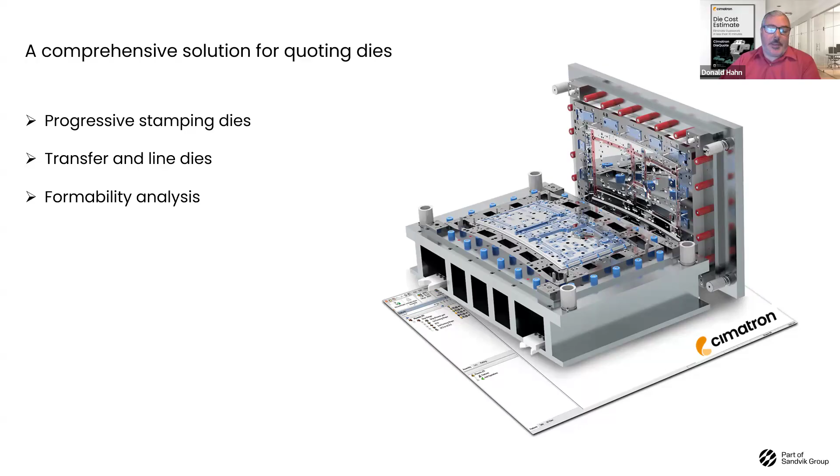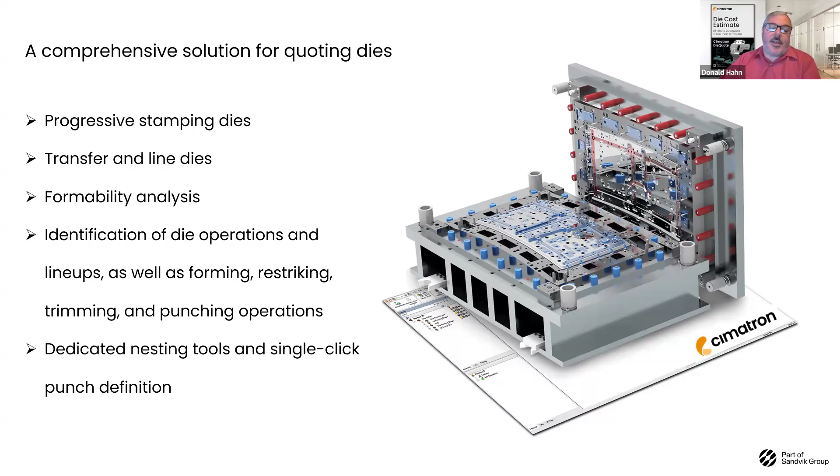Thank you, Brad. So today we'll be looking at our comprehensive solution for quoting dies. We'll be able to handle both progressive stamping dies and transfer and line dies as well. We'll show you some of the formability analysis tools that we have. During the demo, you'll see how we can handle die operations with forming, restriking, trimming, and punching. We also have dedicated nesting tools and single-click punch definition, which we'll show. We have some measurement tools for thickness, draft angle, and body integrity. We also can calculate automatically the die sets, plates, components, and stations. We have support for multiple currencies and labor rates.

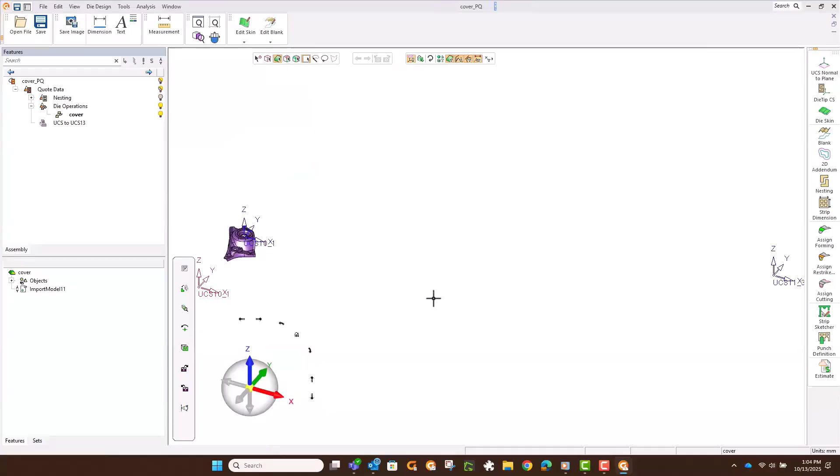Once we have established what we're reading in, we're going to bring it into our progressive die environment, in this case, since we're going to do a progressive die quote. On the left side, you'll see the history and the operations that we're going through with each step. On the right side, you see the guide, which simply steps us through the quote.

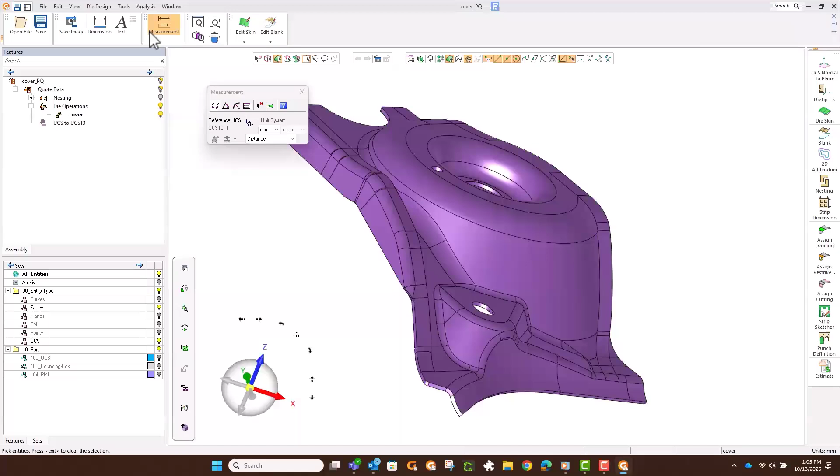First of all, the part that arrives may not necessarily be in the perfect die tip. We have the tools, though, to establish what that tip should be, and it's a little better than just visually looking at it. Other things we might need to check are to understand what my overall sizes are, how much space this thing is going to take up. Here you see it will quickly generate a box for me to get the overall XYZ size. It could be in millimeters, could be in inches. You can work in any of those formats however you wish at whichever time.

Another nice tool is to check to make sure that the angles of the part are going to release. Here you see a draft angle analysis tool, based upon a range of colors and values that you can control. So anything less than 10 degrees is going to show up in a color other than green.

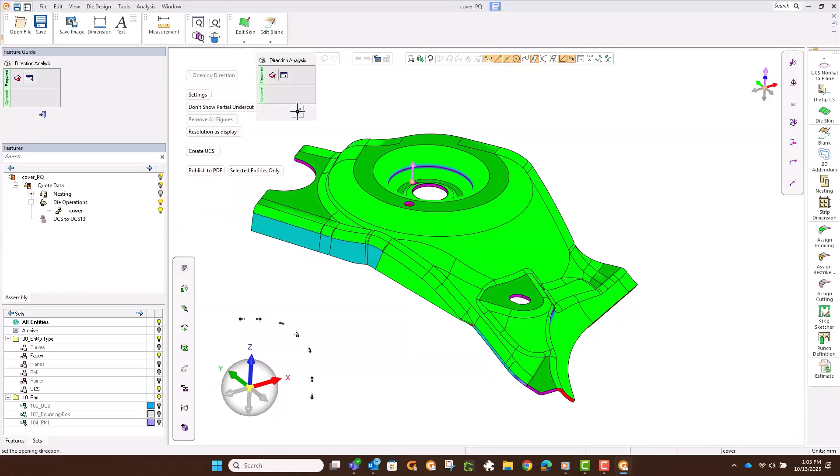If I'm truly at a vertical wall, you'll see 0. If it's flat, it's 90. And all through, I can check to see at every location if I've got a wall that's going to pull correctly or not.

Finally, we also look at the material thickness. If it's going to be something I'm going to make off of a coil, then definitely I want a consistent thickness. There might be areas too that require another operation, like a coining operation, for example.

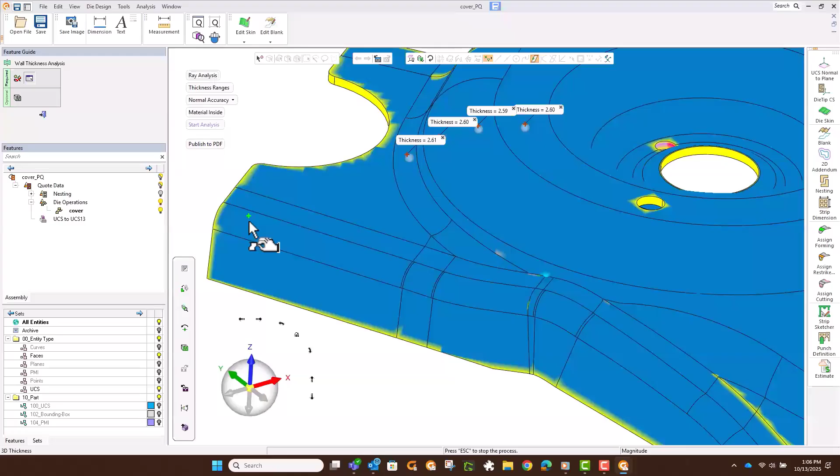Here you can see using some tools to quickly measure in any specific area, like with a sphere or a ray, we can get that overall thickness. The ray simply works normal from whatever point I pick and stops when it hits the other side, whereas the sphere looks at the volume between all the faces right there in the nearby area.

With this tool comes a nice looking sectioning tool that will likewise display in the same colors and color ranges. At any time we can cut a quick cross section if we need to explain something to a customer, or ask them a question why there's a difference in the thickness. So lots of quick visualization tools.

And you'll see up there on the main menu, save image. So there's a lot of quick shortcuts to getting the information we need.

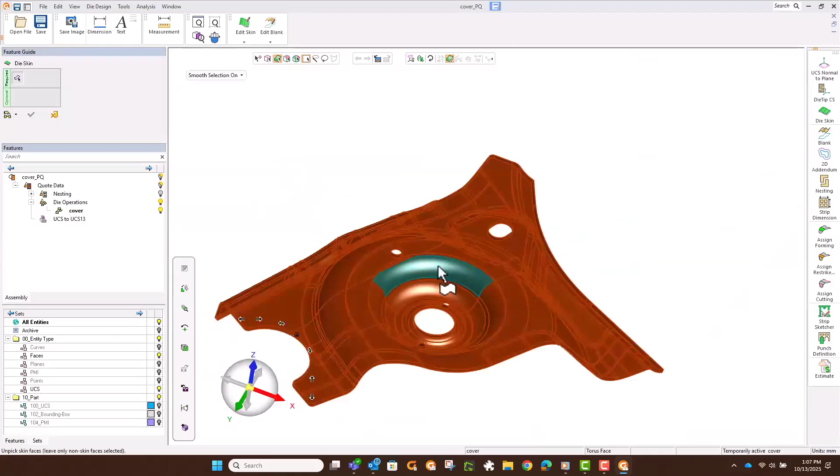So at this point, we're going to decide if we want to work with the inside or outside. That's so that we're going to mathematically compute from one side or the other, or down the middle, whatever the formula is set for, 1/3 or 2/3 relationship.

Now we're going to estimate the blank. Here you see within the library a ton of different materials that are available, already pre-built for you when it comes to estimating what their blank is going to create. Of course, every material has different properties, so the results are always going to be different depending upon that material. So let's pick one kind of middle of the road here.

You can see the system knows it's 2.6 mil thick. And now we'll do a thickness analysis, checking to see the percentages of the material as they may flow.

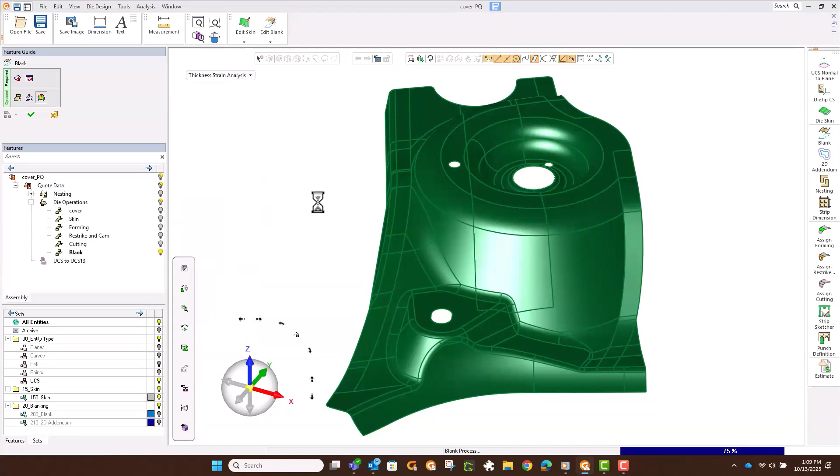Some areas the material may gather, some areas it may thin. Here we get a good view of exactly what that looks like in terms of the percentage of that material flow. Wherever I bring my cursor, I get the full breakdown if it's safe or not.

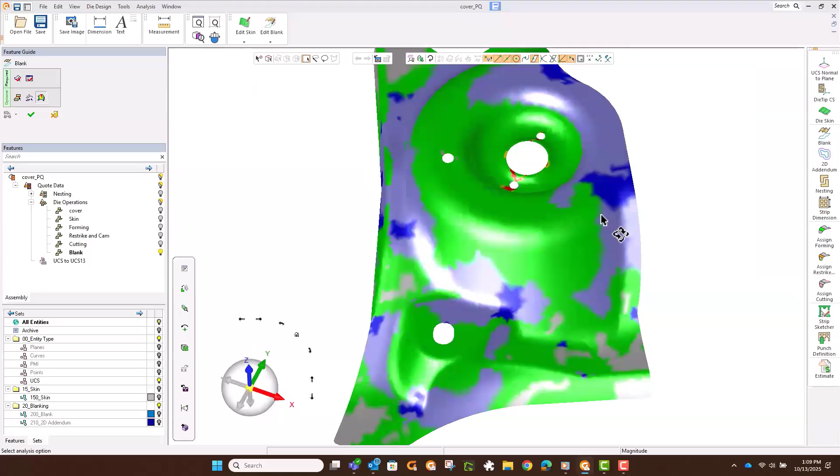Another useful tool is the safety zone analysis. If you're from the die world, you can think of this as your FLD curve. It's going to show you areas that are likely going to split or wrinkle. Some very quick tools to help you understand the formability of that part.

So we're going to actually go ahead now and calculate out the blank, and we'll let it take a few seconds to get that outline. Within just a matter of seconds, you can see how it factors all those things in to get our overall blank. So you would think of this as a one-hit type of application, a one-hit type of blank, rather than a fully developed incremental type of blank.

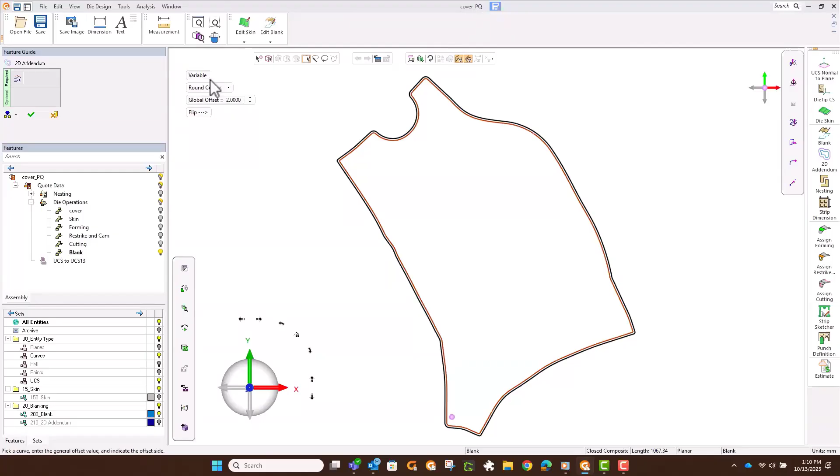Here we're creating an offset. Maybe we want extra material all the way around, and we want to include that in the piece part price because we're going to come back and trim it up later. So we'd like to see where that trimming operation will take place.

In our nesting tool, we can do a 1-row, 2-row. You see how it tries to reduce material usage by interlacing those different nested blanks.

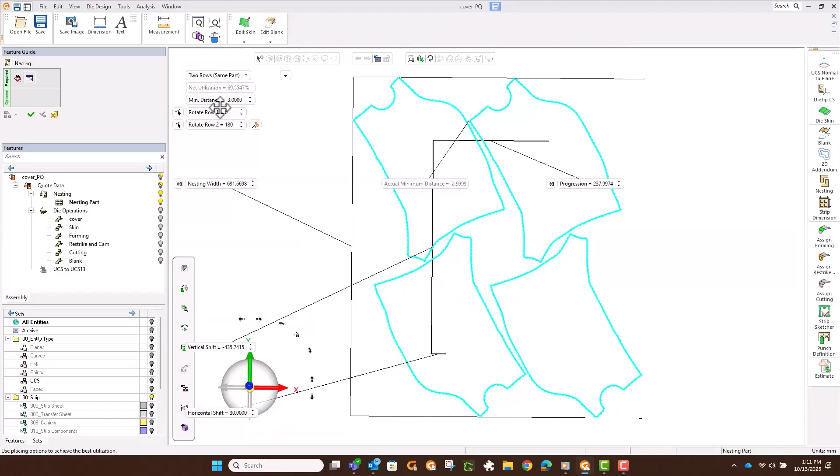You have full control over how far apart you want the different pieces to be, all the while keeping track of your scrap, your net utilization. You see it's also factoring in what the progression should be.

Now, if I wanted to, I can get the optimal nesting condition where it has the greatest net utilization, which can be nice, can be useful. At times that optimal condition may not be the best tool though.

So here I've got in mind where I want to have the web attached to the part so that I can carry it, and I want to rotate that to that position. Just by flicking through these different up and down arrows, you can see easily we can control where that nesting is going to be.

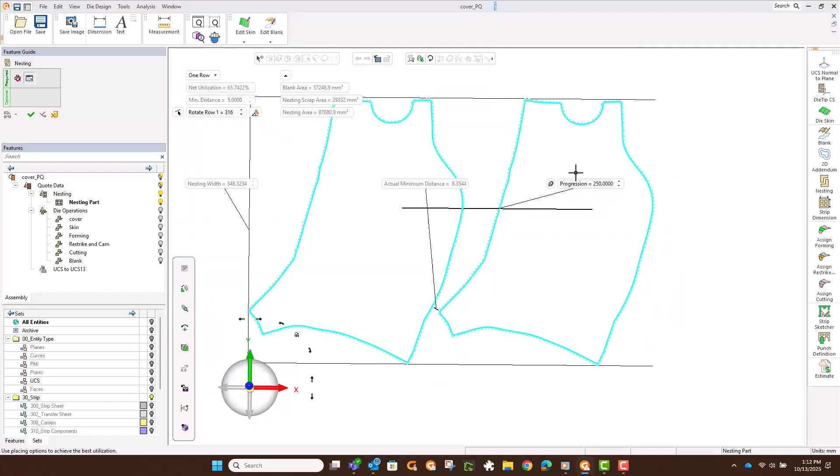And how far apart the different stations are going to be. And maybe we'll round the progression to an easy number here, something easy to remember like 250.

So quickly, we've got the nest done. Next, we want to get our overall coil size. Do I want to trim off to the very corners of my blank, or more than likely, if I'm going to have a carrier and web, I need a little extra material there. You can manipulate these numbers so it's either uniform on both sides or different. With a single carrier on the top, I don't need any on the bottom, so I'll leave just enough to shear off that sharp corner.

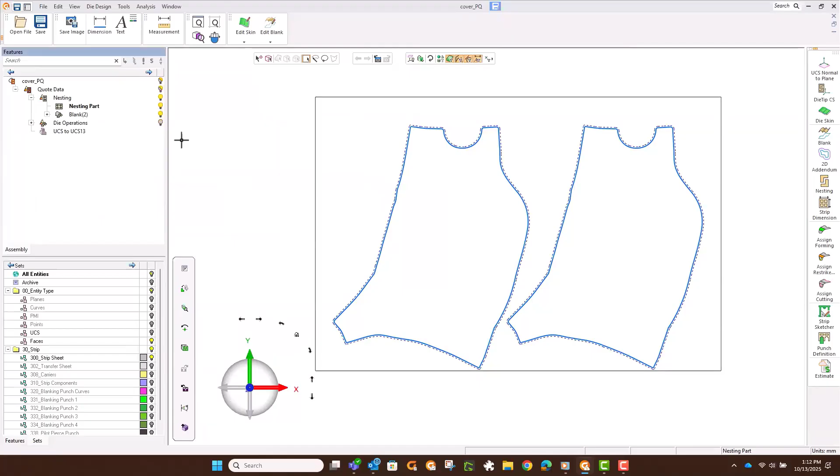There I have my overall strip width that I'll be calculating from.

Inside the sketcher, we want to get just a rough idea of what this strip might look like. We don't have to be perfect or pretty it up like a full-blown progressive die design, just get estimates of how big the carrier might be or where we might put our webs. Here I'm envisioning at the end I'm going to come back and shear off that half round shape. Maybe I'll break out 2 punches there and have a punch at the bottom to clean up that edge off the coil. Everything is very easily manipulated. You can add dimensions, but you don't need them.

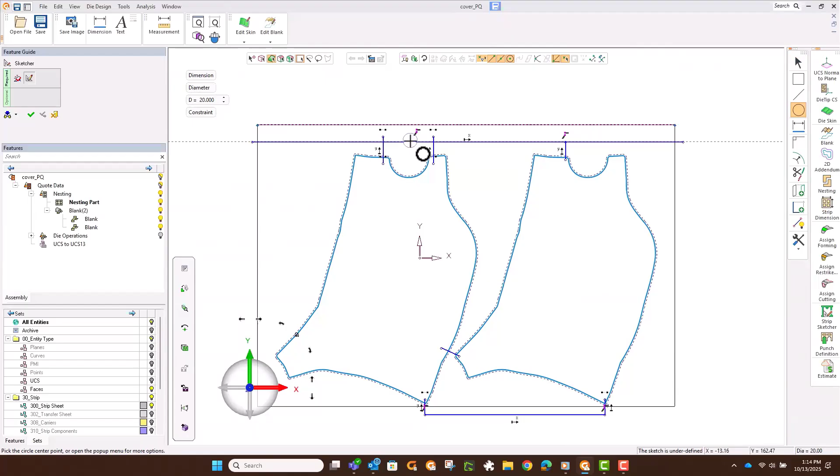Pretty much the sizes we get are going to come from the geometry itself when we get our calculation for overall steel sizes. Next, we want to have a pilot. Where I put the pilot isn't really that important, it's just a matter that I have it, so I can identify a pilot station, and it will carry the number of pilots down the road with each of the stations we generate.

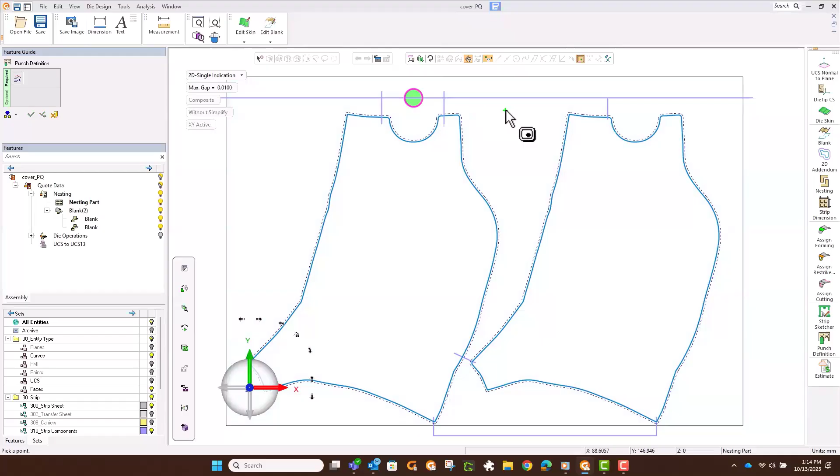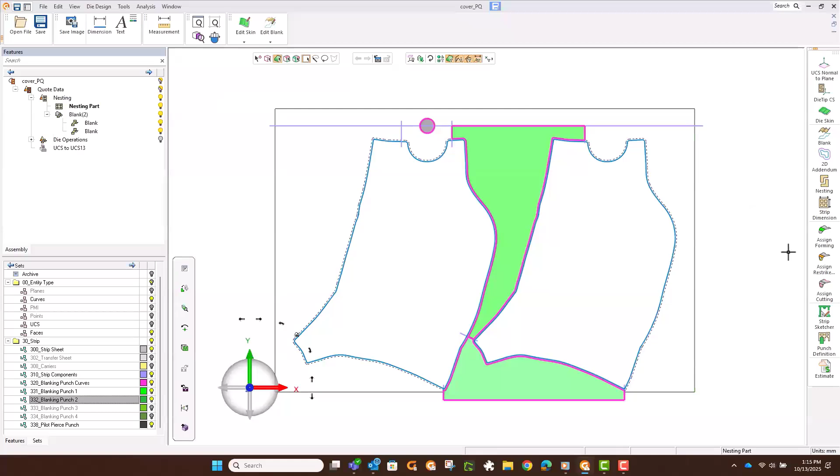So to quickly get some punches, we just single pick indicate where those different punches, or in this case the pilot, are going to be. Here I have a big punch that's going to take that material out. This one's going to come off the edge. So I've got 2 major punches and my pilot, and we identify what goes on what station. Here's a pilot for my pilot station, and I've got 1 blanking punch, here's the second blanking punch. So you see I've already got 3 punch stations, and I already know the sizes of the stations. I know the perimeter, to understand what it will take to wire EDM those punches, as well as the holes the punches go through and the holder for the punch.

Let's do something similar now when we look at the forms. Basically, how many hits do I want to form this? Well, I see the 2 sides that are bent down as separate forms. I might see another form in the middle. So I've just used the paintbrush here and quickly traced across what I want to call, in this case, this flange form. So I've got my main form done already, and now I'm going to break out each of these individual smaller form areas.

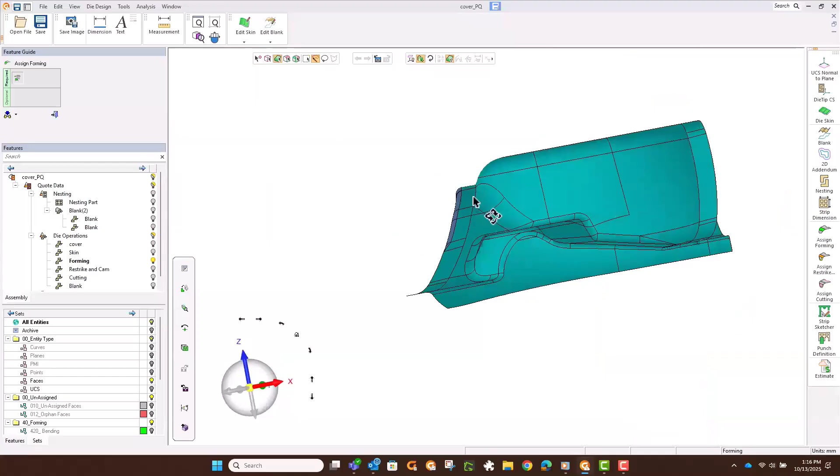Maybe down here in the center, I'm going to bend it down, then bend it back up, and I'd like to isolate each of those. So just by dropping in the paint, and then coming over here to my list, calling it a form, I've now got 4 forming stations. And again, it knows how big these stations are because it's taking the measurements right off the part. All right, here's another one. If I get extra, just repick it, and now I've got another forming station. So very quickly, just by coloring the part up, I'm identifying the type of station, and it's getting its size, and it's going to be able to calculate the cost of that station.

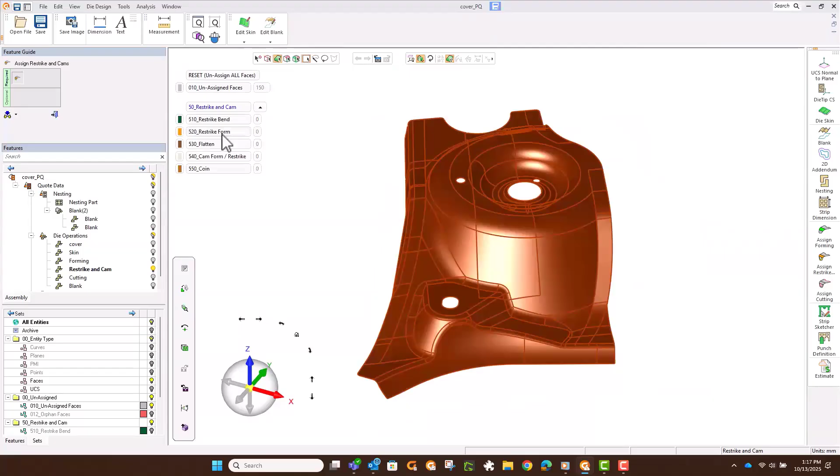Next, let's pick everything for a restrike. Maybe I'm only concerned with the outer 2 flanges to make sure they're correct, but we'll go ahead and hit everything. Again, you can have a number of different restrikes. Now I'm looking at all the different trimming as well as typical punch holes. Here I've got some circular holes, and I have a non-circular hole, so I have a number of different catalog punches I would use to create those.

At this far end, we were looking at cutting it off. So we'll call this a trim edge. It's basically picking the geometry that we want for that trim edge, and that will be a direct trim.

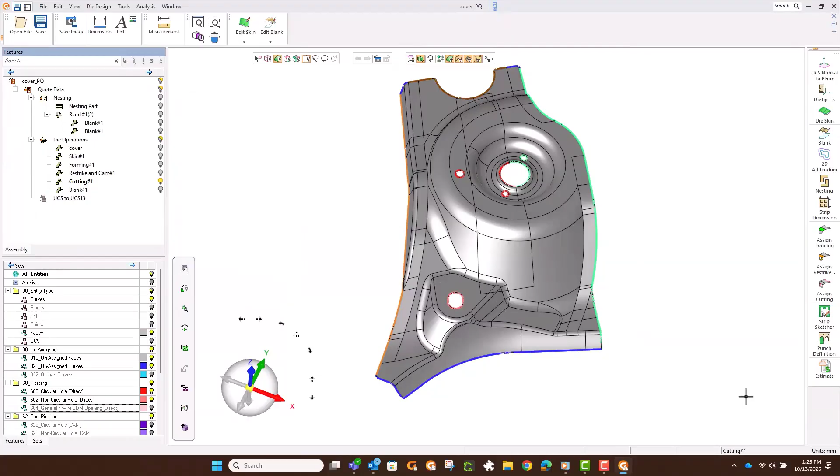Now maybe I want other things that are going to be a trim. Maybe I want that edge to be on a trim. You have the choice of either making it a direct trim, or it can be a cam trim, where you use a side mechanism to trim that. That will greatly affect the price, also the tooling price, because you have that station.

Finally we'll take it over to costing, where we say I've got a single edge carrier, and we'll generate some prices. As soon as I see my die quote, it has already calculated the tooling cost. But let's step through and look at it.

It's just basically working off the standards that we already have in place, so those standards can be your standards. You'll see how it's calculated the overall blank. It's looking at the different cutting and forming, the wire EDM distance, the number of stations throughout the die. It's calculated everything that we marked up, and it knows how many blanking stations and how many trim stations.

Maybe in my mind I'm thinking I really could use one more idle station. So you can easily just go in and change that value, tell it to update. Then it grays out the top there, like you see with all those top tabs, so it wants you to take a look at everything to make sure it's where you want it to be.

Do I want to have nitrogen springs? What type of materials am I using? Here in the pull down, I can grab any common steel that I have set up in the library. And when it grabs that steel, it's of course now going to cost that plate out based upon the steel price that's already set in the system.

So I would pick those steels, something that makes sense, obviously - O2, A2, that kind of type of steel. Here you've got your overall lengths of each of the plates, the plate thicknesses.

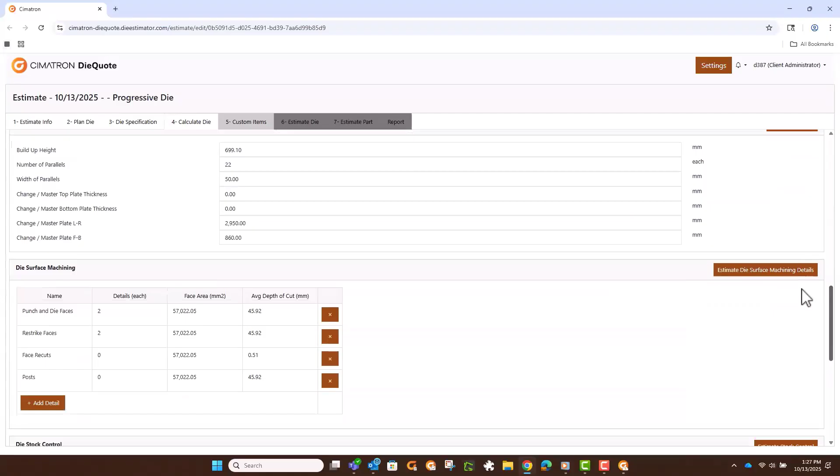And now we're looking at the press. You can have a library of presses based upon the customers that you're quoting for. If you see something in red, that means it does not meet the specification of that press, so it alarms you to that. There was the overall stack height.

Now I'm looking at parts that I want to maybe have in stock, just so I have those for replacement if I need them. Is there something about this particular die that's different? Well, I can use some parts that aren't typical, that I might not usually quote for a typical die. Like maybe I want to have a chute to gather all the slug drop and kick it off to the side away from the press. You can include those things as well on a non-typical basis.

Once we have done that, we looked at some of the settings, so it's now going to recalculate where everything gets updated live as we work with it. Under estimate die, the blue is your material, the green is your labor.

So here's a full breakdown for all the different plates - here you see the parallels, you see the punched holes, all your stripper plates. We've itemized out the spring pockets, the spools, what is involved with each of the materials, and then of course the labor rate that goes into performing that operation, whatever it may be.

Here at the end, you get the final cost breakdown - about 235,000. Up at the top, you see it was done with United States labor rate, so also no profit. So let's say maybe we want to do it somewhere else.

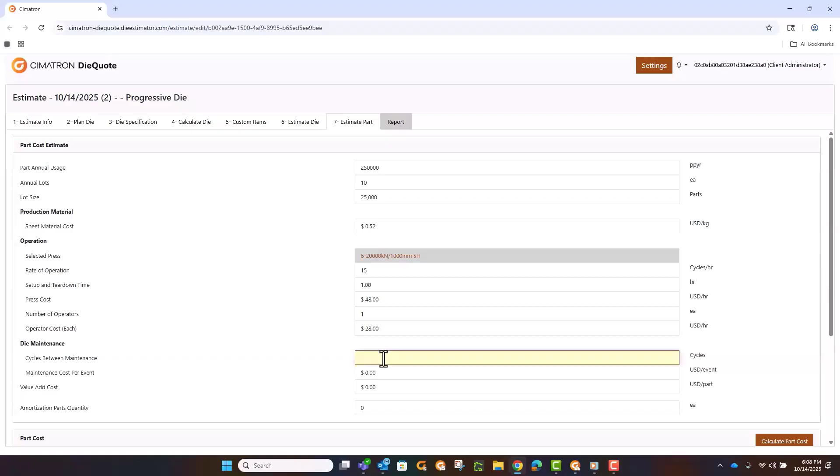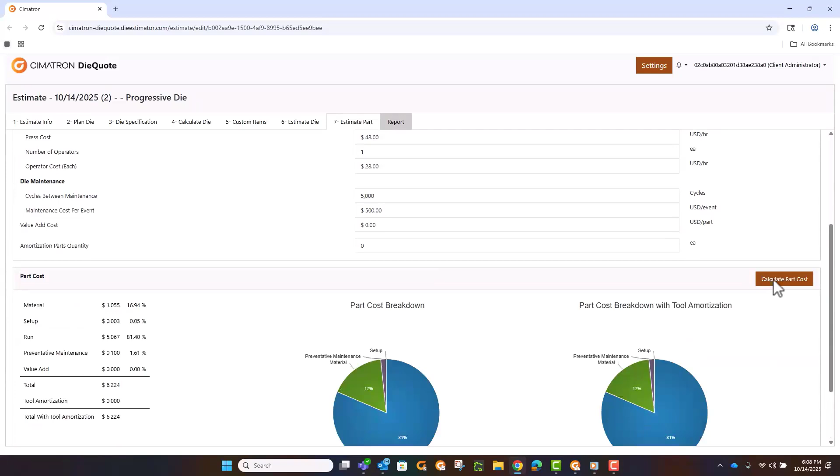Well, probably should take a look at it, maybe do some maintenance. Maybe 50 thousand is too much, let's go 5 thousand. And then each time I interrupt, what am I going to charge for the maintenance? There's a place you could put a value-added cost if you want, and you can amortize your tooling over your piece part price. Here we just broke it down to what it would cost to make the part.

So a fantastic calculator for putting together a piece part price. Now in our report, we gather all that information together. Here you see every bit of it ready to be sent out to a report, and when we send it out, it's going to be an Excel format.

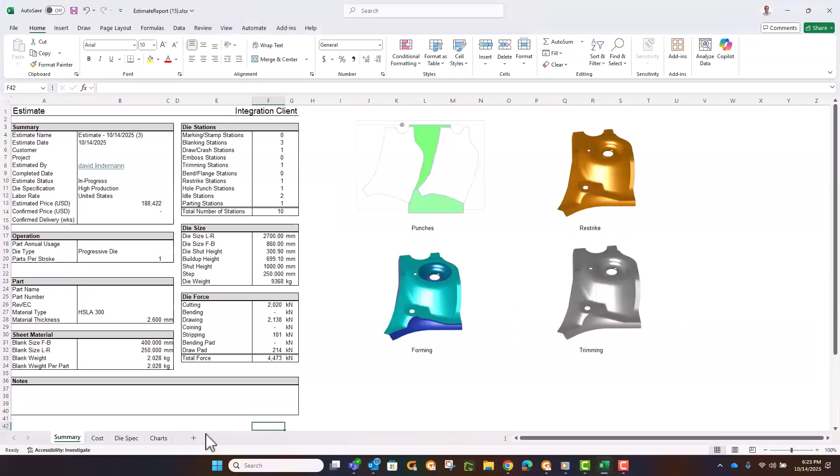So from there, you can customize it to whatever your needs are. Maybe you've got different Excel spreadsheets or templates that you use for different customers. You see a summary, an overall cost breakdown, your die specs, and your charts. And you notice on the first one, the summary, you can drop pictures in at any time, just hit the picture button and pop it into your report whenever you want.

So that's a very fast overview with a breakdown of everything we could talk about as quickly as we could here. Let's just run one through again, and we'll do another progressive die with a different part.

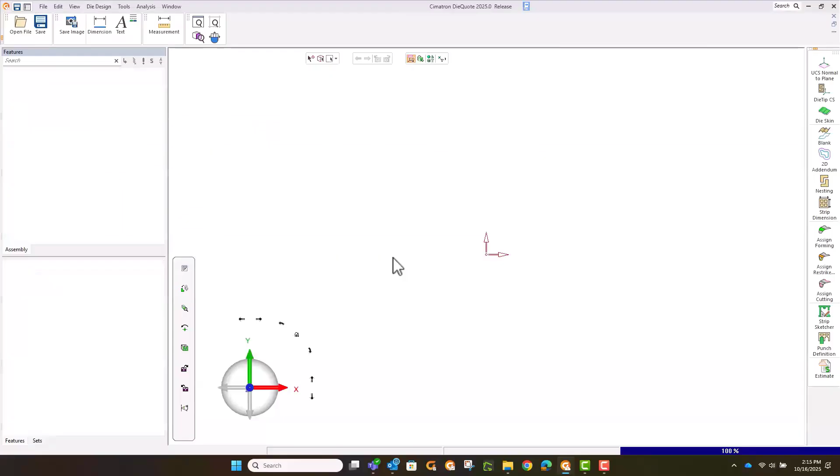This one's going to be quite a bit bigger. And looking at this part, you can see it's got some big flanges on both sides. There's a lot of forming going on right in the middle of it. So maybe we envision it to be a 2-out.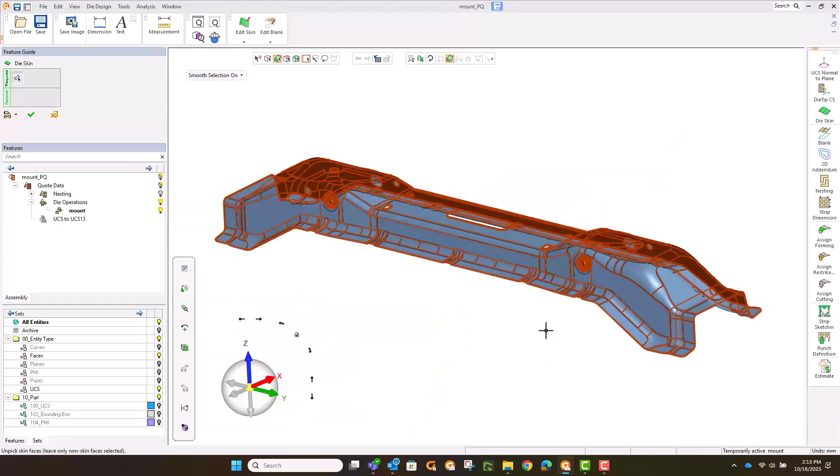It gave us an interesting message when we went to skin it, saying there's extra material here. You can see that this part came with the nuts already attached. So instead of worrying about removing that geometry, we'll let it do it for us. It knows what the sheet metal is that we're attacking, and that's what we're going to build on.

As before, it breaks it out into those 4 operation zones where we can identify what we want to do with each. Here we go right to the blank. Again, the thickness has been established, and the material properties have already been established once we pick the material, so it knows how it's going to go about unfolding it.

Much as before, it's a crash form, which is usually sufficient for a quote. Again, the strain analysis lets us check for formability, making sure we're not getting into anything too terribly deep that's beyond us. I might worry about some of the wrinkling that I see.

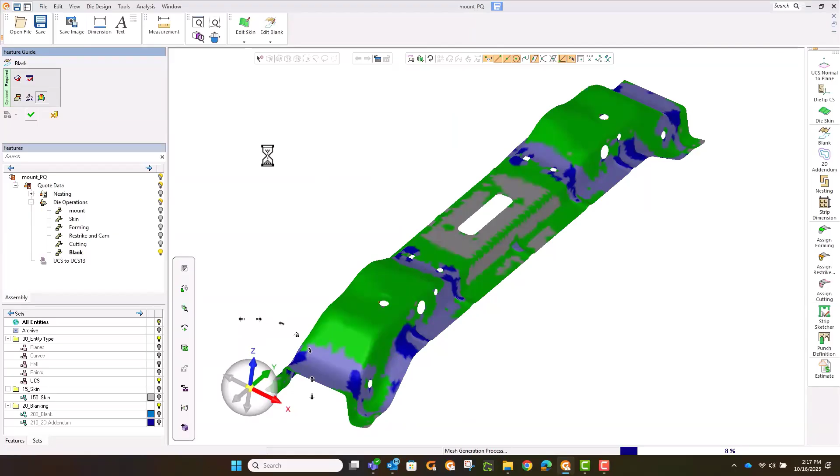So that might tell me I might want to stretch that material a bit. Do I do something else like form it twice, or add more material around it? If I were doing a transfer die, would I want to maybe put a draw bead in? The blank will allow you to do just that. You can also include draw beads as well as blank holders and pressure pads.

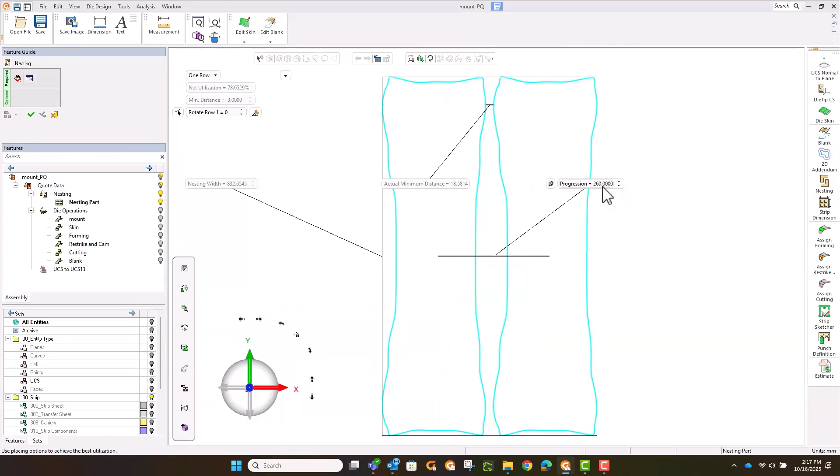Like before, we're setting up the nesting. As I pull my progression wider apart, I can see the actual distance left in between. That's going to give me an idea of just how thin that one little punch is going to get. In this case, maybe we're thinking we'll have a carrier on the top and a carrier on the bottom.

All right, so give myself a little more material to work with. And like before, we want to create as simple a sketch as we can.

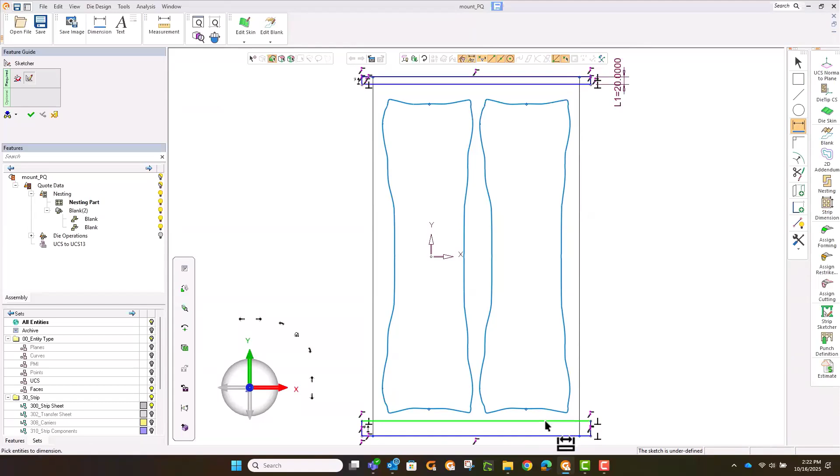Now, I had someone ask me, I do pretty much the same type of carriers and webs. Can I just keep doing that and save that sketch and use it again and again? Yes, you can. We do allow for that, so you can save your sketch and just drop it in. You might look at this part and say, well, I'd kind of like an expandable web, at least on one of those ends. Well, that'd be the time. Create it once, save it, now just drop it in.

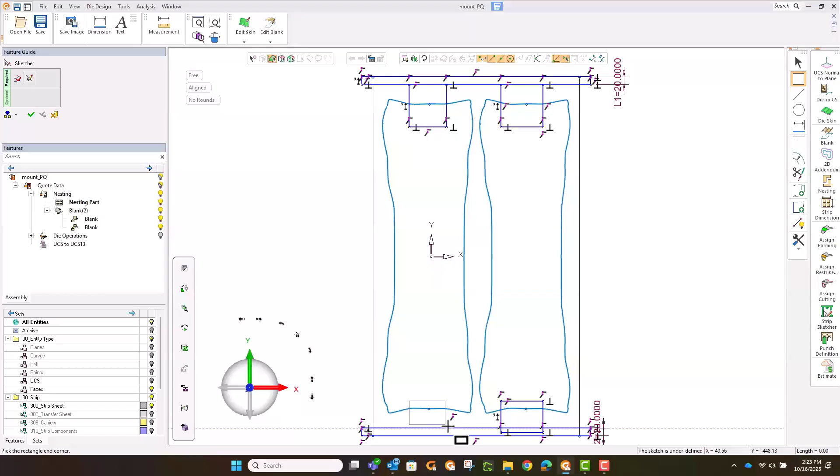Another way of handling that is, again, you're just looking for the cost of it. It would be to add another punch station and include the cost for the punch that it would take to make the expandable web. So I'm letting the constraints of the sketcher show me when I'm lined up, parallel, perpendicular, and maybe just a few dimensions here, just so that I know I've got the balance that I want. So you can see just a couple picks, snap the dimension in, and I'm good.

I'm really only concerned about that punch area that's between the two blanks. Do I have to be perfect on those corners? No, I'm just getting the essence of what I need to do with 3 punches to create that part.

Again, I'd like to create a pilot. So we'll simply just snap in a pilot. I'm not even worried about lining it up perfectly. I'm not designing here. I'm quoting.

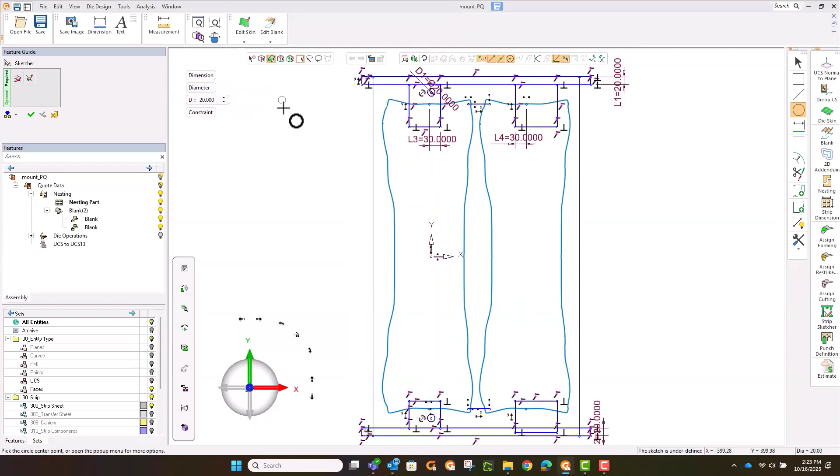Right? So now we can go about and establish how big these punches are and what the size is and what the cost will be then. So single pick those areas again. There's my 3 punches.

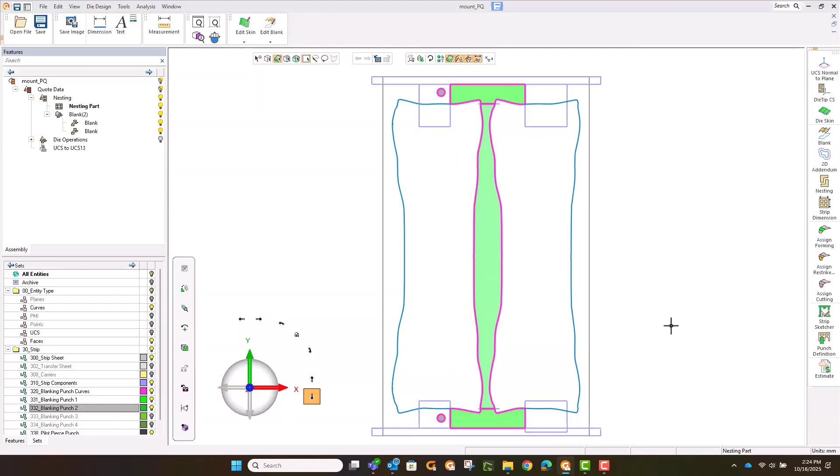And then with the 2 pilot holes, we'll pick both of those. We'll tell the system they are uniquely the pilot. So that's going to be the shape repeated. That's where my pilot's going to go. So I have a station for those. Maybe the 2 end punches I'll keep together in the same station, but that big middle one, we'll put that out there as a separate punch.

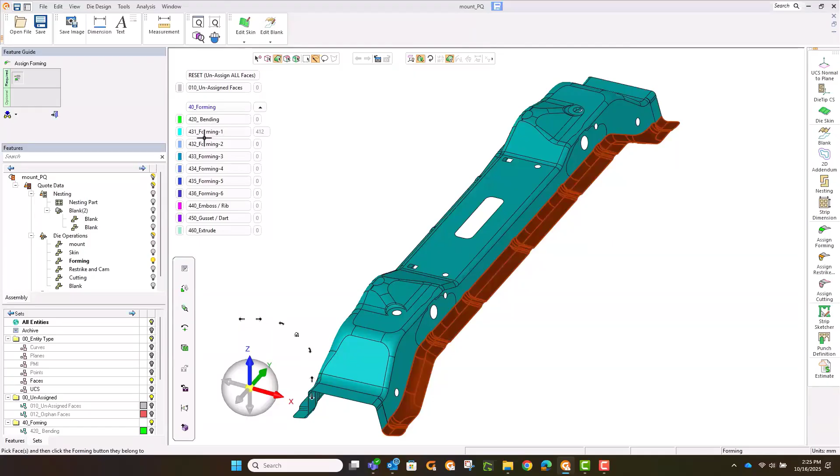On to forming. Well, I'm probably going to form the majority of it, as much as I can anyway, with the first hit. But then I need to address what to do on these outside flanges. So we'll go ahead and pick these. Now by picking that and putting it on a different, you almost call it like a set or a layer, you see it will deduct it from the first forming station and include it in the second forming station. Likewise, we'll do the same on this side.

Maybe I want to include these as 2 separate forms. That way I can use forming punches to come down in between where the blank would be, basically. So one punch would do each side at one time. Okay, that looks good. Again, it's generating all the information for me that I need in the background.

Let's do a restrike on everything, as opposed to making maybe 2 separate restrikes for each of those flanges. And now let's take a look at what we're going to do for piercing.

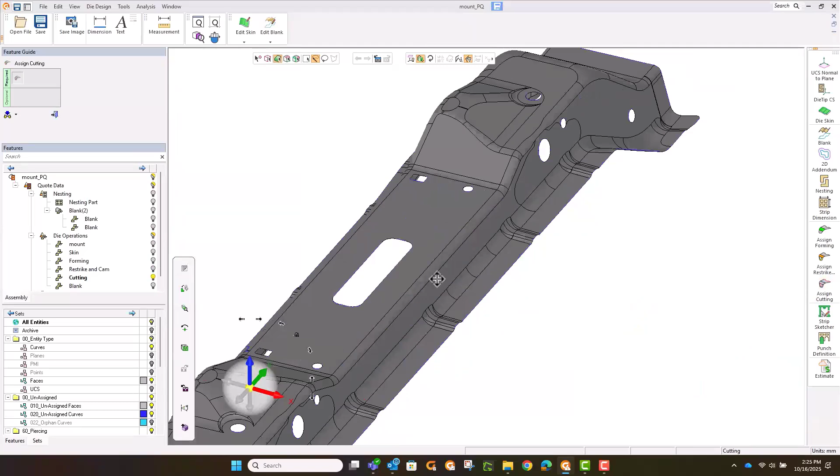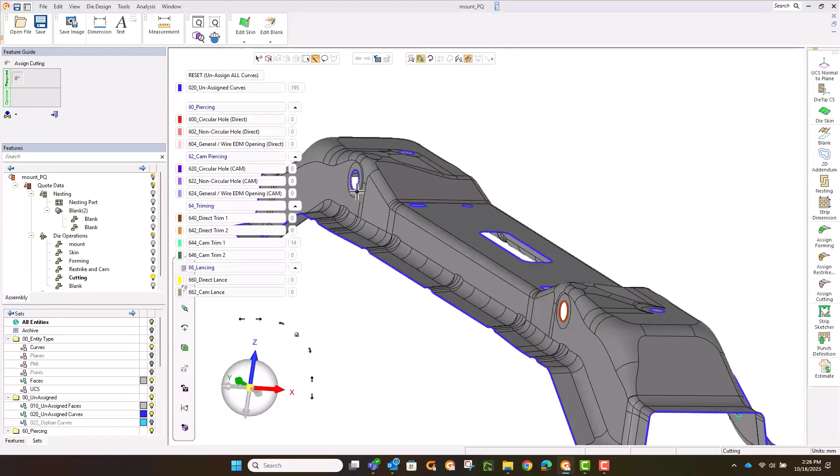Well, here I've got these side holes, and I could elect to make them straight holes that I would do while the blank is flat, or in this case, maybe we're concerned about the accuracy, so we'll do them on a cam. Same here on the opposite side. So we'll have 2 separate cam stations, 2 separate trimming stations.

Looking down the center of the part, I've got those nice, easy round holes, so I'm just going to drag my paintbrush across those, gather that information. And then we've got these rectangular holes. Try to pick my edges as clean as I can. Looks like I missed a piece right back there. And then one more up here. That's good. So it identifies those areas for me.

And I can have separate costing for all of that. Down here on the ends, those I'm going to trim up. Also, I'm going to trim these up. And then it looks like, again, I need to get a little closer on the right-hand side. So we'll just pick back through that again. So it's pretty straightforward and easy to pick these things.

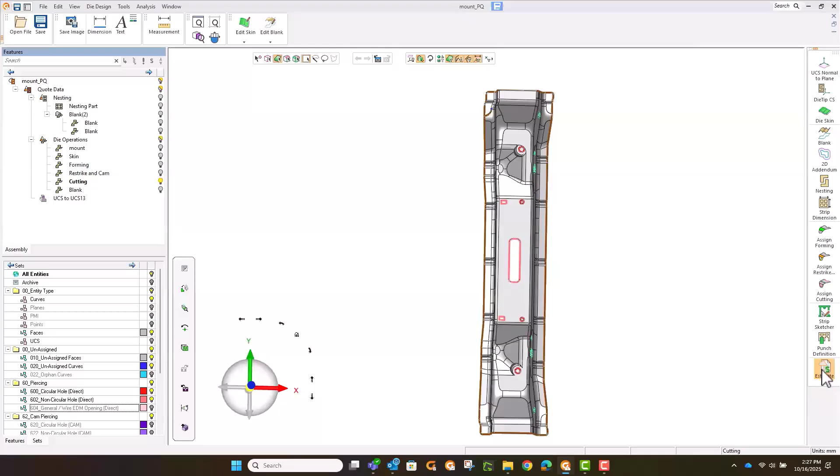And those things we want to use as a direct trim. So depending on how concerned I am about those outer edges, do I want to retrim them or not? I know I want to trim on the ends, but it becomes just a matter of understanding what the needs of the part are.

With that, we'll do a double carrier, one top, one bottom. We'll take it to the estimation part of our software, which is up on the cloud. You might say that no important data, confidential data, is going to the cloud. It's just the information, the math.

Scrolling through, maybe I just want to do a couple changes. Again, we'll do something simple like maybe change the idles. All right, that's going to change my overall total stations. Maybe I want to include another punch station because I'm concerned about making a webbing. Answer the die specification - yeah, I want my 2D, 3D drawings, all that. Go ahead and recalculate it now because of the new stations.

No custom items for now. Under die estimate, again, we look at the material. We'll look at the labor rate. So here, just to get the cost of it in US dollars, I leave it as it is.

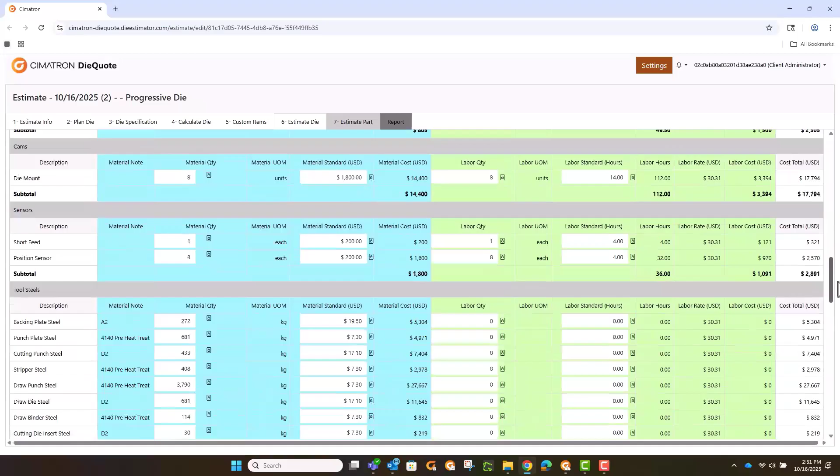But now I'm thinking, well, let's actually make it in Mexico with 20% profit. And I will recalculate everything. So again, scrolling all the way back down to the bottom, now I see what that bottom line number is. Plus the delivery time, total amount spent in order to create this die. So that quickly we've gotten to the bottom line number, which is what I want to show you. So if you're kind of in your head keeping track of the time that it takes, you get an idea what it's like to actually work with it.

Let's do a transfer die. All right, so very much the same as before. We'll pick our part - your choice to work in inches or millimeters. Same wizard as before. Now here you can see what the part looks like. We want to pull our die direction up along the Z-axis here.

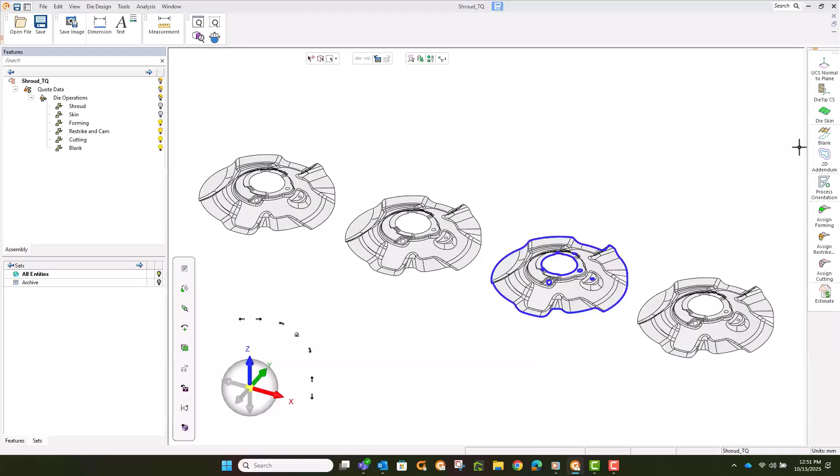And let's just start stepping through it. So when I hit the die skin calculation, it not only grabs either the punch side or the die side, but you've been seeing how it lays out these 4 zones. One will be for forming, one will be for restriking, one will be for the blank. Again, pick my material.

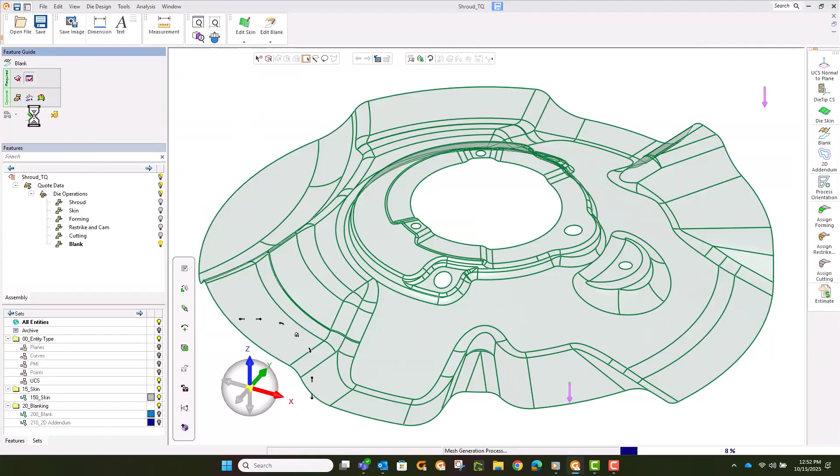And with that, we know we got it. Go ahead and calculate it. This will give us very quickly the overall blank size. And you can see we're letting it run pretty much real time down there at the bottom. Okay, so there's my blank size. Flip that around so you can see it's not quite a perfect circle.

Here with our transfer dies, we can now look at what type of steel shape we want to work with. All right, is it a rectangular sheet steel? Maybe we'll generate a parallelogram shape. And you can see, of course, with round shapes it's going to be very similar, but it can mathematically generate these different shapes depending upon what's best, including a chevron here. Rectangular is perfect - it's because we're sticking to the rules of the minimum amount of material.

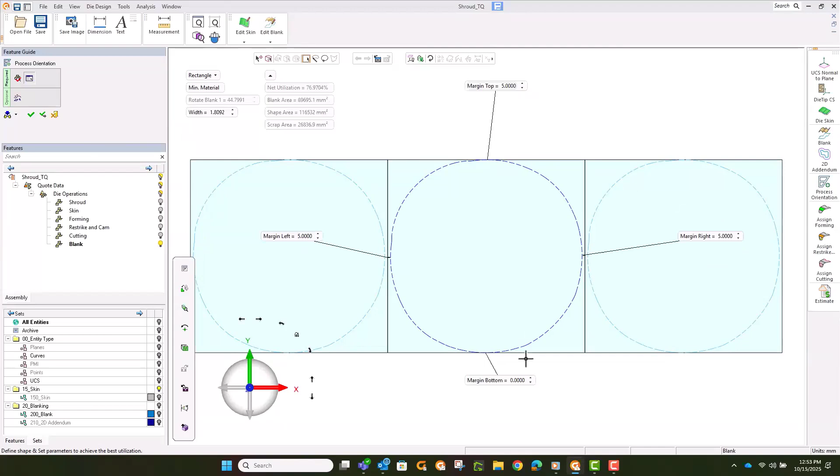Give ourselves maybe 5 millimeters in between. And then do I want to have something on the top and the bottom to cut off? Sure. All right, so there we've got our sheet steel. And there we just progress onward.

All right, next thing we'll do is we'll pick our forming. We'll do this pretty straightforward. Pretty much this whole thing can be made with one forming die. So we'll throw that all under forming.

Next, we'll do a restrike. Perhaps again, I'm thinking, I'd like my flats to be really flat, but one restrike ought to be sufficient to get that done. Finally, I'm looking at my trims, also the punch holes that I'm going to create. See how it goes through, and if it's a true round, it will identify that for you. And already that true round is placed inside my circular hole listing.

Grab those remainders. Maybe I'm forcing it to be a circular hole, right? Now we'll go through and scribble my way around this looping center hole, which goes up and down. See, it's got a couple of different heights to it.

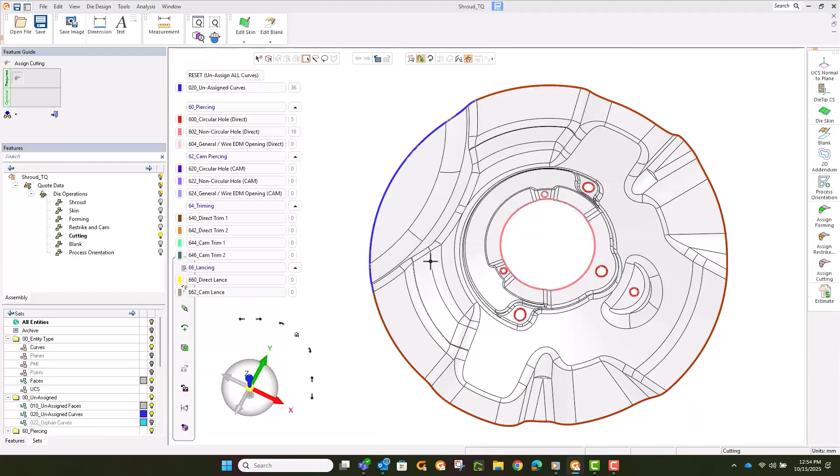Finally, we'll look at the overall trimming. All right, that would be a big operation. We'll pick all the outside perimeter. And just like that.

Okay, so we've gathered the information we need. We'll take this over to our estimation. No carrier.

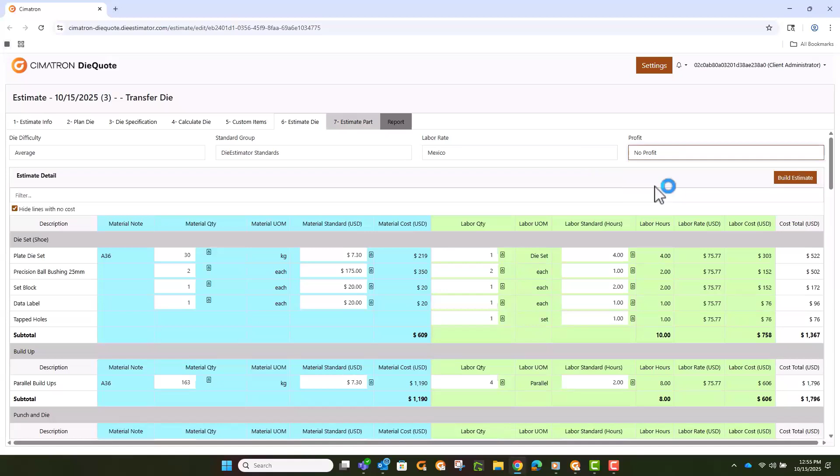And then from here we can see what the die lineup will be. We already know it's basically going to be the typical four transfer dies that we would need. And you can see die type, it says transfer. And here we'll go right to the bottom line. Again, we'll pick where we want it made, pick our profit, have it calculate. And now if we go right to the bottom, you can see what that die lineup would be, what the cost would be. Right. So very quick, very fast.

We know that most people quoting dies are quoting them by the thousands, and they're typically getting maybe 2-3%. So there's a lot of quoting going on, and to be able to do it quickly is just a huge issue.

One more, let's just take a look at something with some straight linear bends. So you can see it's pretty straightforward when we run this through. Same process. Pick the part, bring it into our quoting software.

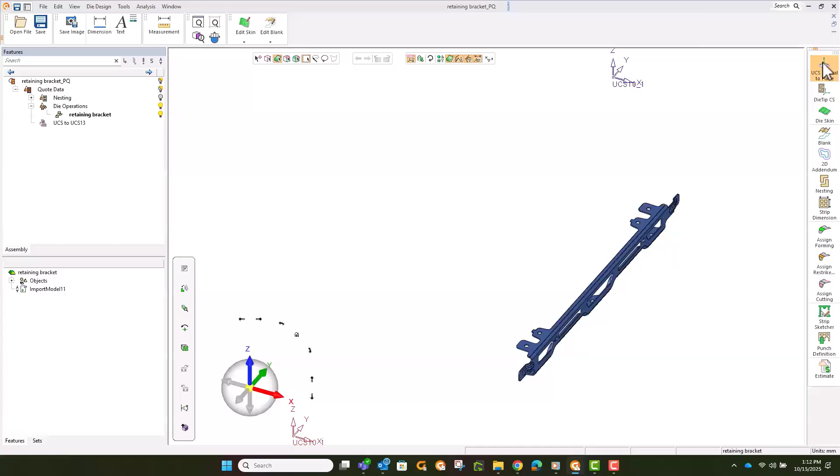This is a simple little bracket. As you can see, it's got mostly 90-degree bends on it. Fairly long though, so we might have to have 2 carriers, even maybe a little bit of an expanded carrier, since we got a little bit of a fold going on each of the ends. I'm just going to step through and let it happen, right?

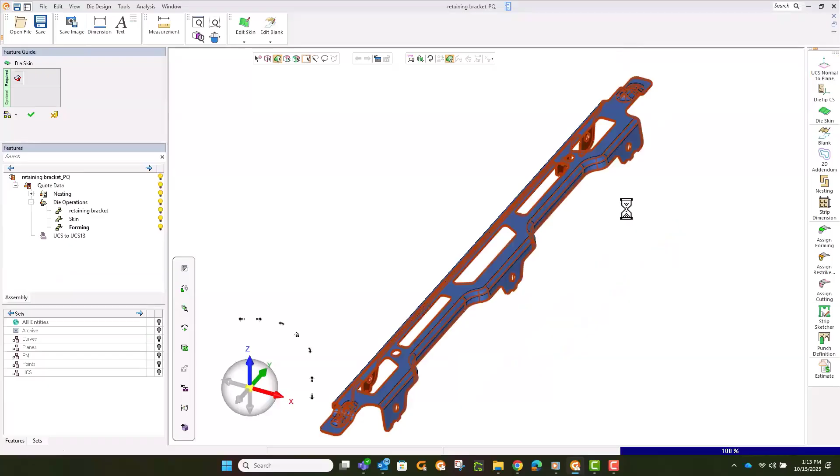There's my die set. There's my die skin. There it's creating all the different areas where I'm going to define each of the stations. And here I pick my material. Maybe we'll break it up and do something different here. Maybe pull in a stainless, let's say. Again, all the factors I need are already loaded for me.

Now it goes out and establishes what that blank is going to look like. There's the blank.

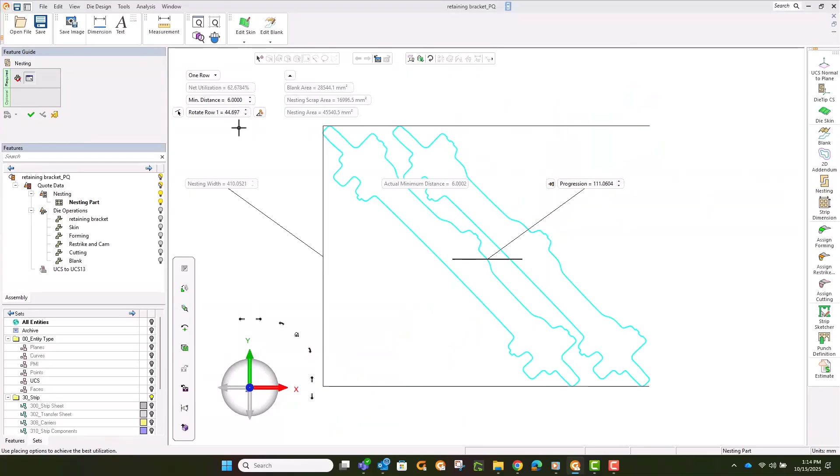Next, we'll start to lay out our nesting. How much distance do I want to have in between these different blanks? I'm always, again, looking at my net utilization. Do I want to see what it looks like optimized, where it's like the absolute best net utilization? Interesting how it picks those things on an angle for me, but I'm up to 62% utilization. So it's the trade-off then between the best use of the material and what helps it make it the most toolable.

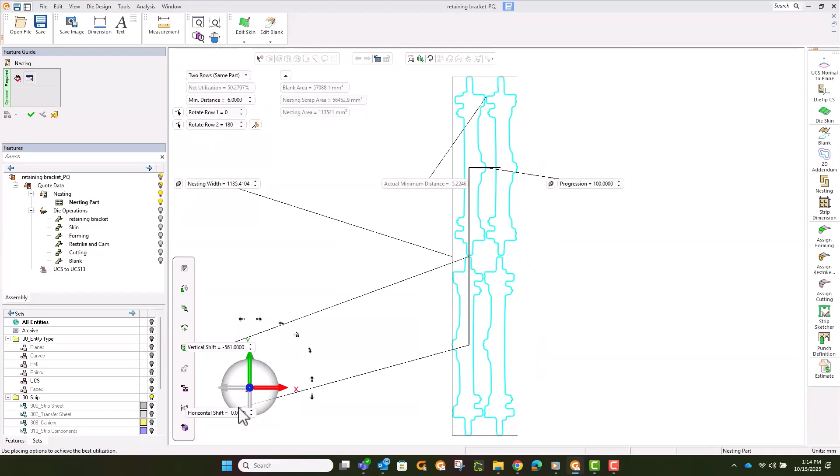Got my progression. Maybe for kicks, I look at a 1 out or 2 out, just to kind of feel what it would look like. Rotate it around, change the horizontal and vertical shift. That way I'm just kind of nudging it along to see what it looks like if I get further and further away.

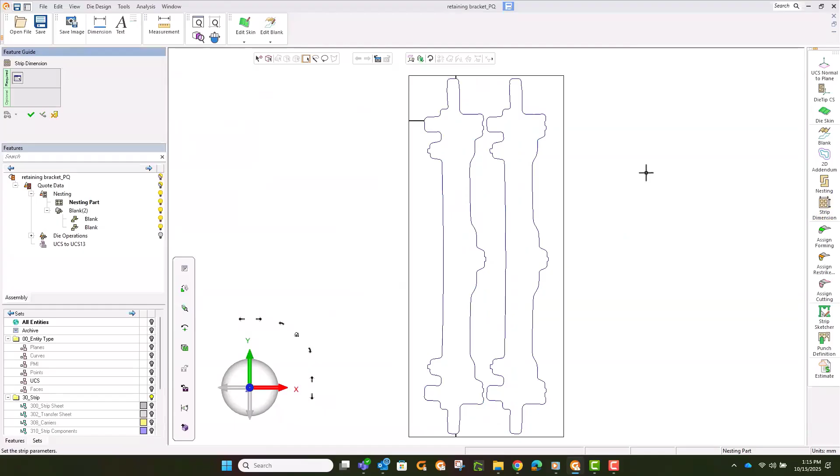All the tools are there. We'll keep it simple, just a 1 out die. Now we're going to set up what our coil width would be. So again, we're going to need room to have a carrier, top and bottom. That looks good.

Quick little sketch to establish a carrier. And pretty much all that's going to be is just 2 simple rectangles. Let's zoom up here on the end and just have a couple points we can attach the web to. In this case, I'm not even really going to worry too much about my dimensions. So right there's my endpoint.

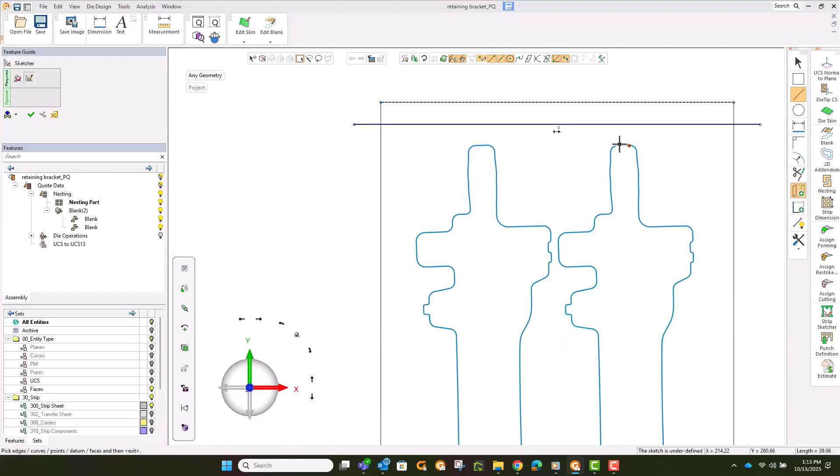Now you've noticed you've got a part filter. That way you can isolate, say, I only want to see endpoints. I don't need to pick anything else. That makes it a bit easier to zip right.

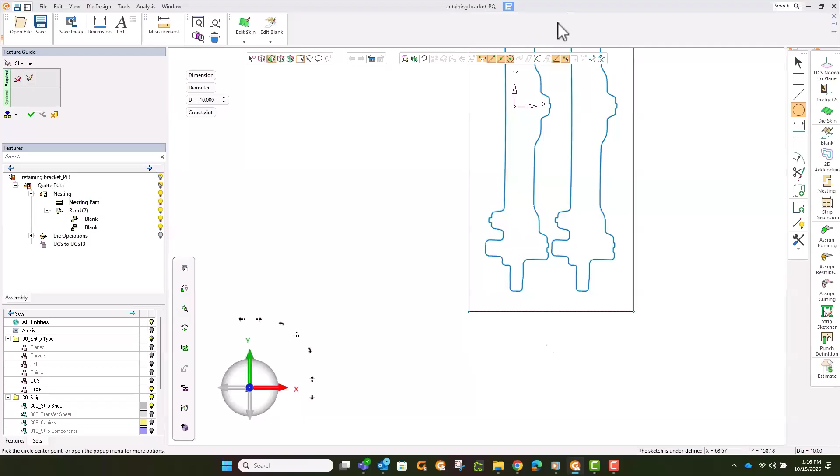So just a quick representation of what this is going to be, because as you can tell, pretty much what I'm the most interested in is getting the factors involved for those punches. I want to get the perimeter of the punch, the size of the punch. Once I know the coil width, I'm pretty well established as far as the coil goes.

Couple more quick references. And then a quick sketch. Again, I'm not worried about trimming everything up, like I need to have an absolute perfect, wonderful drawing. It's going to be as dirty and as quick as I need it to be.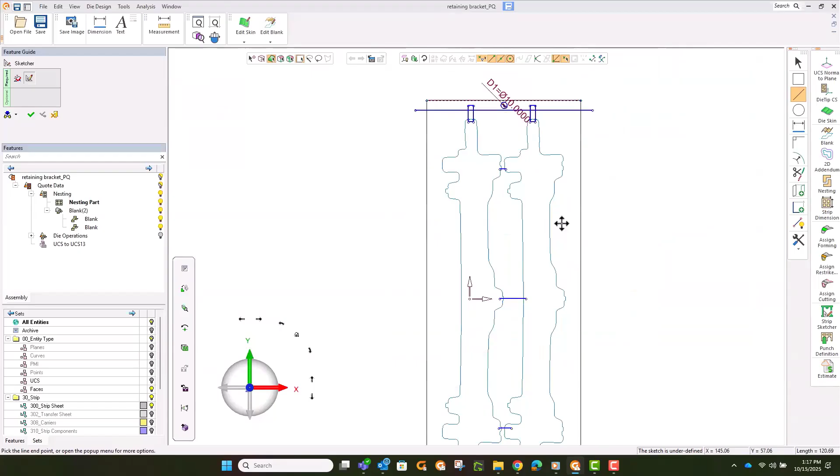So let's break that off as a separate punch. Maybe do the same up here at the other end. You know, look back on this, I think, well, maybe I'd also go back and make those end punches something different. Let's definitely break that in the middle so it's not so big. There I've got my punch configuration. So if down the road I change my mind about things, all I have to do is come back and make a change to it.

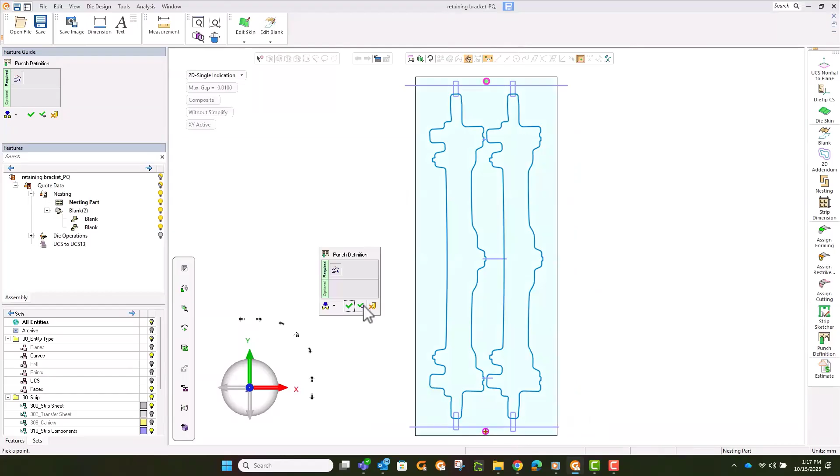There's my pilots. And then we'll grab these 4 punches. Simple singular pick.

Okay, now let's assign them where we want them to go on our lineup over here on the left-hand side. I want to make sure I get a good pick on those pilots. And then just a click and there they go.

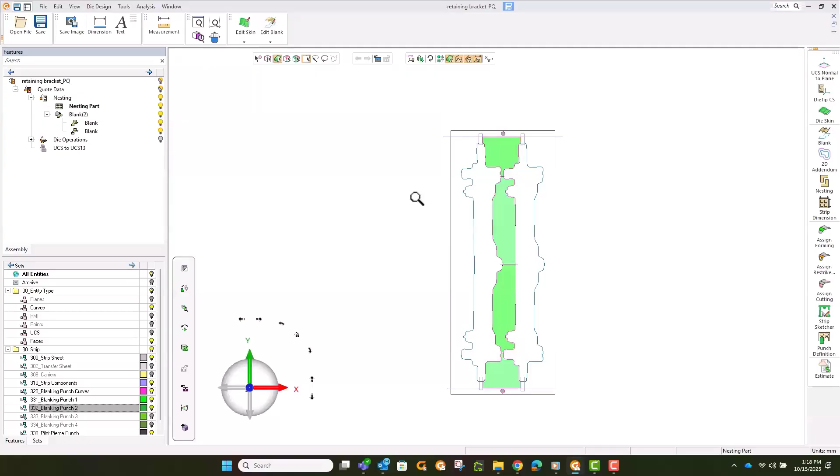So when I look at this now, I'm thinking of staggering it. I could probably do all these punches in 2 stations and just make sure I've got enough distance in between. All right, so I've got 1 pilot station and 2 punch stations, each with 2 punches on them.

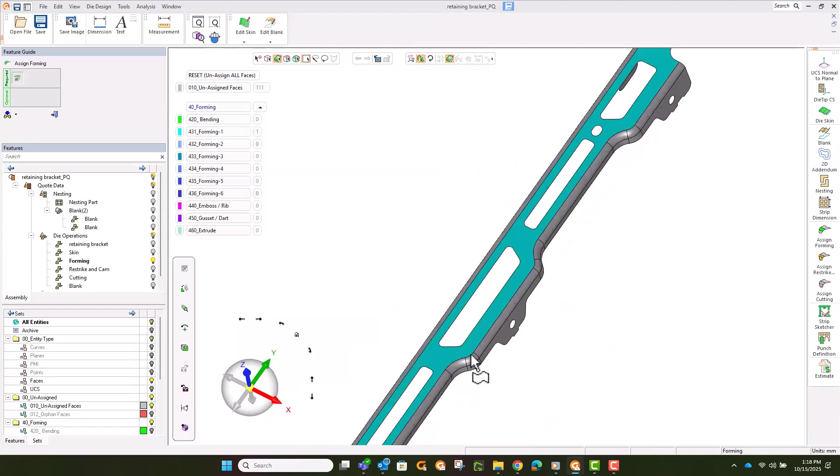Again, here I want to find out, looking at the part, how I'm going to go about making all these different forms. So let's say we're going to have our flat first, and then we'll put that bend in on both of those ends. I'm just going to single pick my way around that, since that appears to be the easiest way to do it.

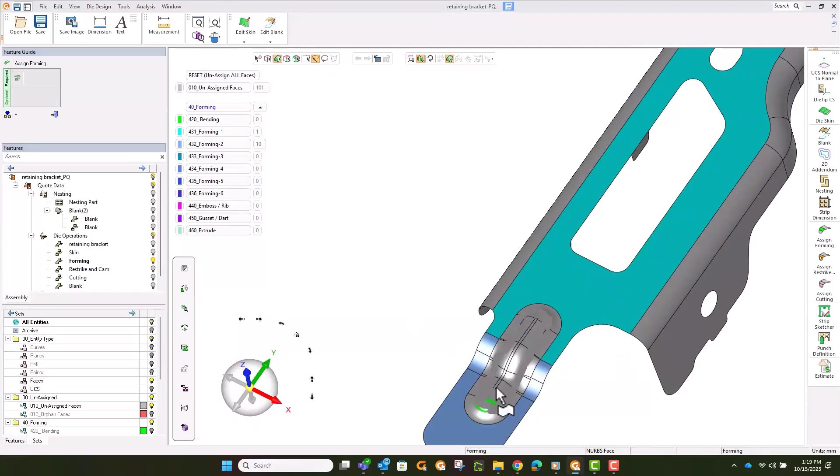All right, and then we'll attach those to our forming. In this case, separate form. Now we'll go through and pick this rib area. Actually, I picked an extra one, so by picking again, I can unpick it. All right, we'll call that a rib.

And you saw it there on the list, all the different die features you can pick. Again, on the other end. There we go.

And all that's left now is going to be those 2 large side flanges. So we'll do each of those separately. And again, our paintbrush comes in handy just to roll right down along that, picking all those faces in one continuous motion.

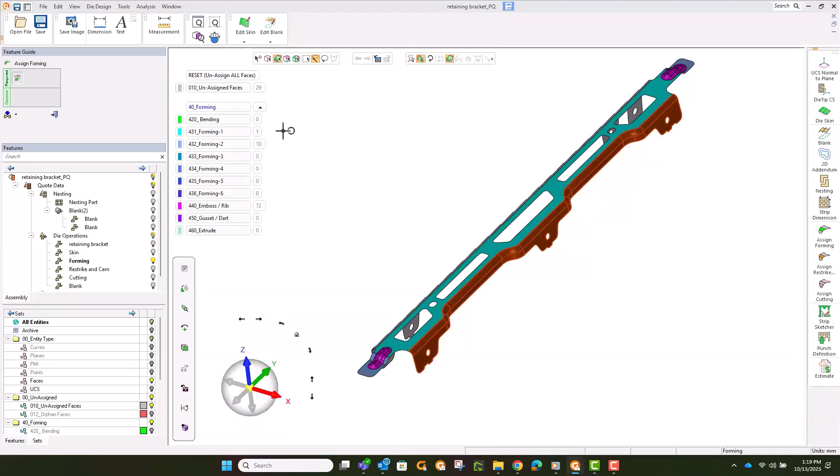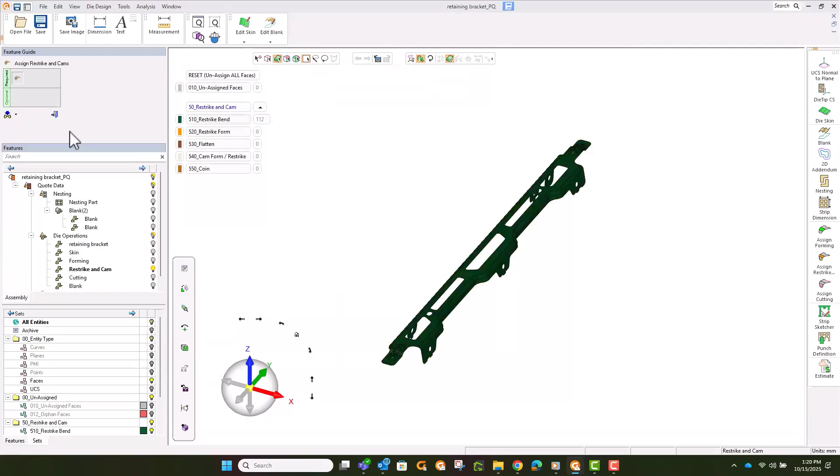Here I'm putting it in as forming. In this case, I could put it in as bending or forming, whatever the case may be. Okay, so now we've got everything picked for our forming stations. We'll go back and do a restrike. Okay, I'm just worried about restriking those outside 2 bends.

And now I've got all these little holes to cut. So again, do I want to do those side holes when they're flat? Do I want to do them in a cam? It's just whatever I call them is how it's going to be handled by the system.

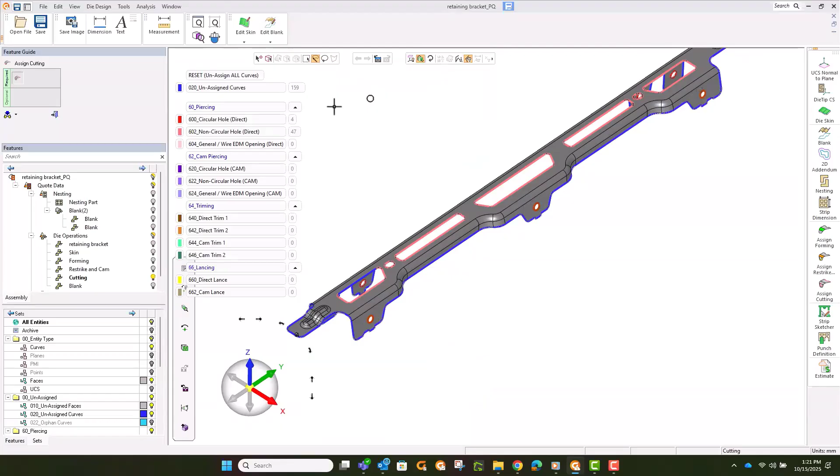So let's grab these rectangles right through here. Those will all be punches, so they're going to be a non-circular punch. And then we've got our 3 holes on this side. Call those a circular hole, and our 4 holes on the opposite side.

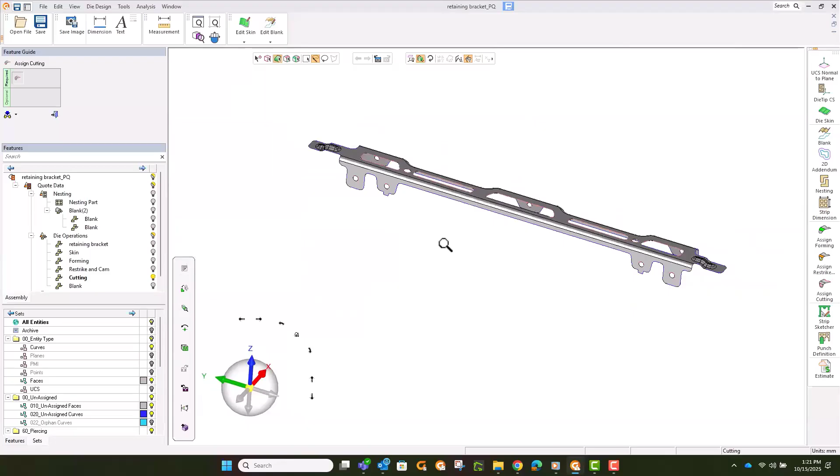So with that straight linear bend, it should be no problem just to bend that over, and those holes should stay nice and round, right? So that one is pretty much colored up the way we need it. We'll take that over to our estimator. That's going to be a double-edged carrier.

Runs through all the stuff that it needs to run through on the cloud. And if I want, I could go right to the bottom line, or I can take again a look at what my different stations are and just kind of change these as I go. So total stations, we estimated at 9. I'm suggesting a couple more idle stations. Hit the update button, step across all these different factors until I've got what I want.

Again, you see all the defaults that it will automatically select for me: the materials for the different plates, the different plate sizes, anything in particular that I want to add to it. And then here's the estimation breakdown: material, labor.

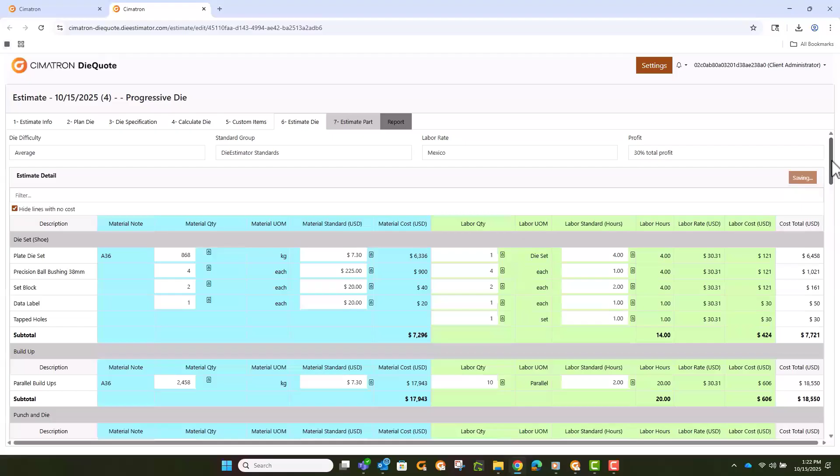Okay, this time, let's go ahead and send this one to Mexico. 30% profit. Generate it. And then when that's done, my bottom line number will be the cost for that die.

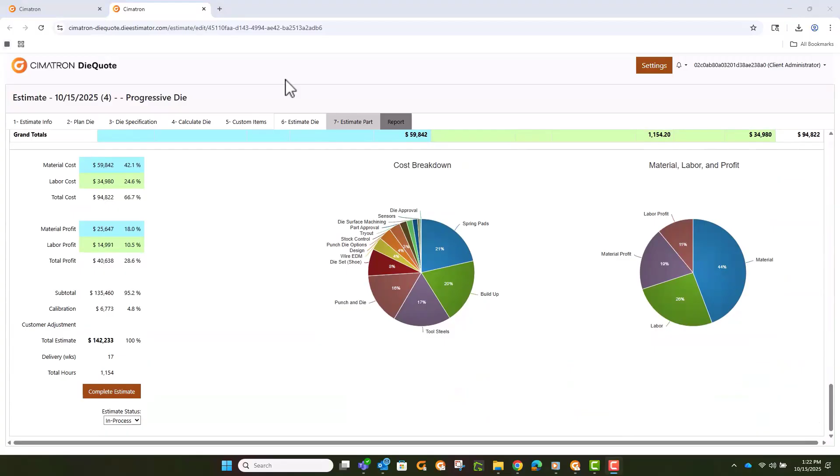So that took maybe 5-6 minutes. It wasn't that long, so you get a good idea of what it's like to work with. Hopefully we explained it well enough that you can see the thought process behind it, and then realize once you've done it a couple times, it becomes pretty automatic, and that there's a lot to it that it's doing for you. There are a lot of calculations that it can make to help you reduce the time it takes to generate these quotes.

So that's pretty much it for me. I guess we hand it back over to Brad.